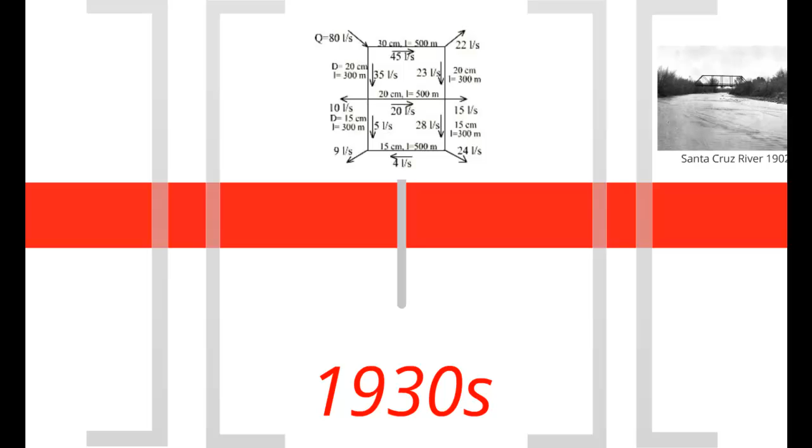In the mid to late 19th century and the first part of the 20th, many hydraulic engineers had been hard at work developing equations we still use today: Darcy, Weisbach, Chézy, Manning, Hazen, and Williams. In 1936, Hardy Cross developed a method of solving for hydraulic properties in a pipe network that was much more efficient and easily used than then current methods, and enabled many problems to be solved even before the advent of computers. These innovations enabled better design of pipe networks for water distribution.

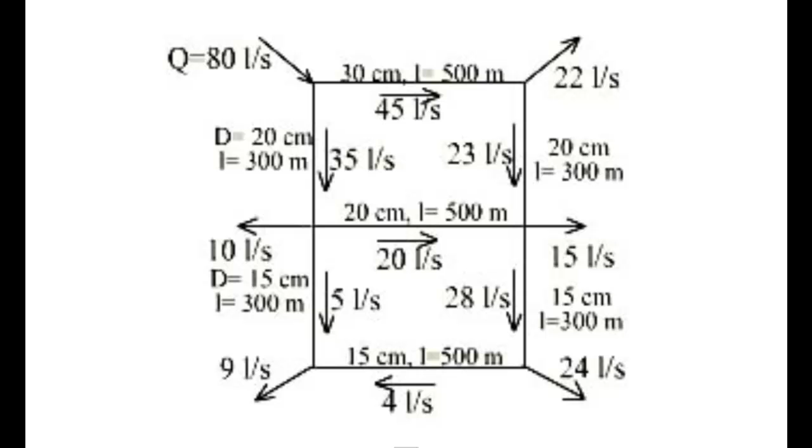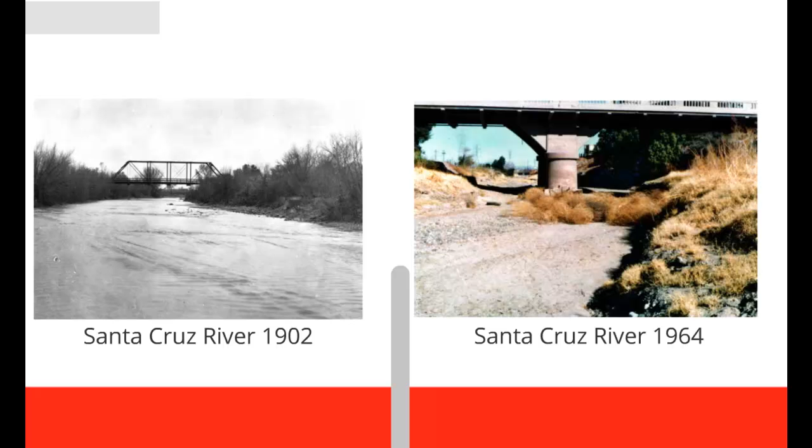By the 1950s and 1960s, it was becoming apparent that waters in the U.S. faced serious problems in terms of pollution and other issues of water management. When we do not take care of our water resources, many difficulties can arise. Here in Tucson, one of the biggest problems related to water was that people started to take more water out of the aquifers than was replaced naturally. The level of the water table dropped dramatically, and the Santa Cruz River, which had historically flowed year-round and provided water to Tucsonans, began to go dry for most of the year.

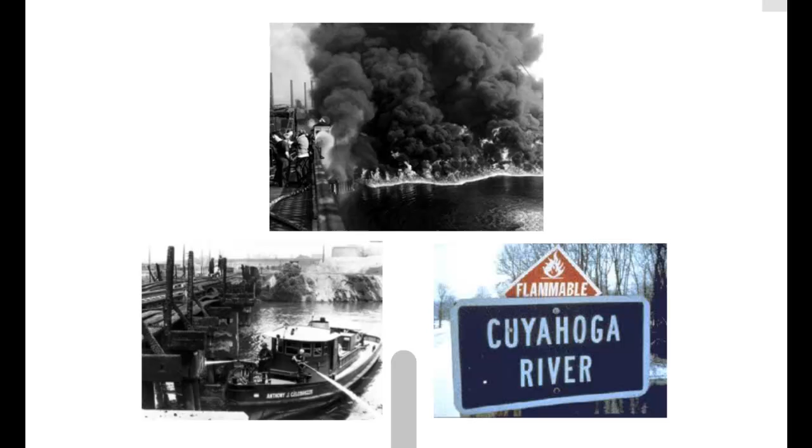On the national scale, the critical moment of realization about water problems came when Ohio's Cuyahoga River burned in 1969. The fire was one of several that had occurred there and elsewhere, but it served to draw attention to the terrible water quality problems caused by improper disposal of industrial chemicals. In the shadow of the Burning River incident, Earth Day was established in 1970, the same year that the Environmental Protection Agency, or EPA, came into existence. And the landmark Clean Water Act was passed in 1972 when Congress overrode President Nixon's veto. In 1974, the Safe Drinking Water Act established standards for concentrations of many substances in drinking water.

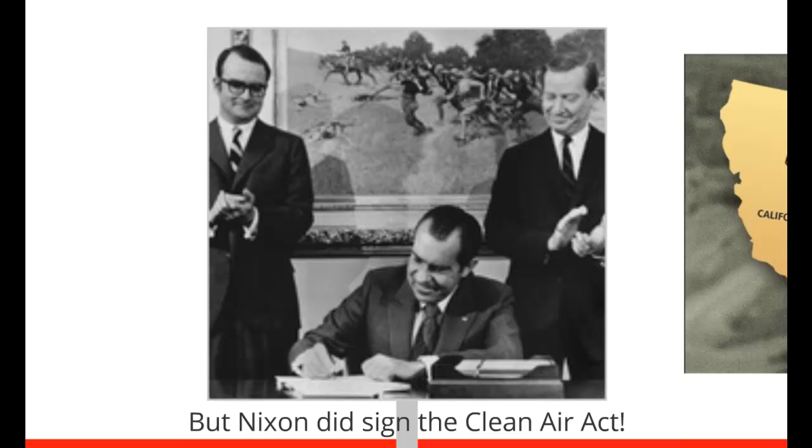Here in Arizona, the construction of the Central Arizona Project Canal began in 1973. The division of Colorado River water amongst 7 western states, with an allotment for Mexico, began in 1922, with final approval of the Colorado River Compact in 1944. After over 20 years of lobbying by Arizona residents and politicians, the construction of the CAP Canal was approved by President Lyndon B. Johnson in 1968. This system of canals and pumping stations brings water to Phoenix and Tucson all the way from the Arizona-California border. The project cost over $4 billion. Today, Arizona's share of the water from the Colorado is 2.8 million acre-feet per year, or enough to support about 2.8 million families of 4 annually.

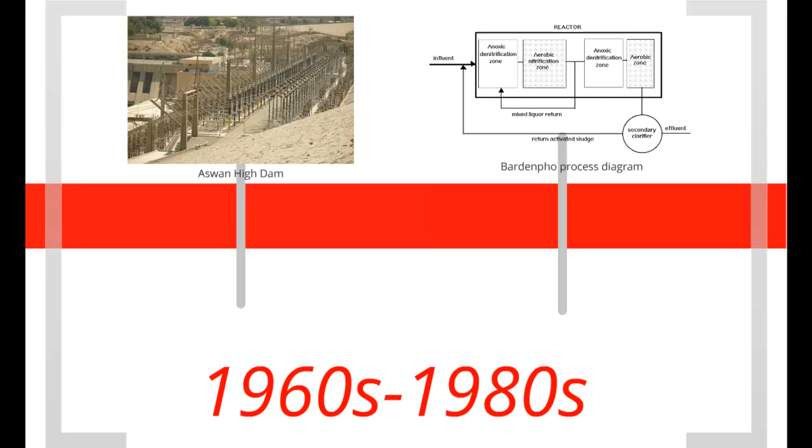Elsewhere in the world, water innovations continued as well, with Kuwait in the 1960s pioneering the use of seawater desalination technology using a method known as multi-stage flash evaporation. In the 1970s, the Aswan High Dam was constructed in Egypt, forming the world's 3rd largest reservoir along the Nile River, a project that produces electricity and reduces Nile flooding, but required thousands of people to relocate and some ancient monuments to be moved to keep from being flooded. And in the 1980s, a South African engineer named James Barnard developed the Bardenpho process of wastewater treatment, which can remove many more nutrients from wastewater with fewer chemicals.

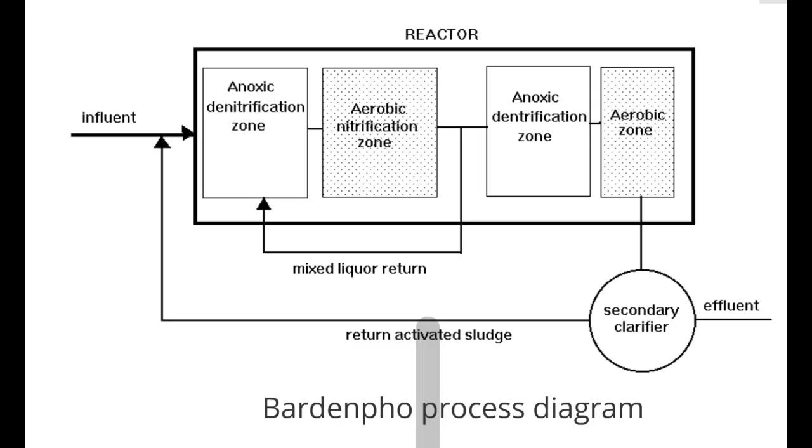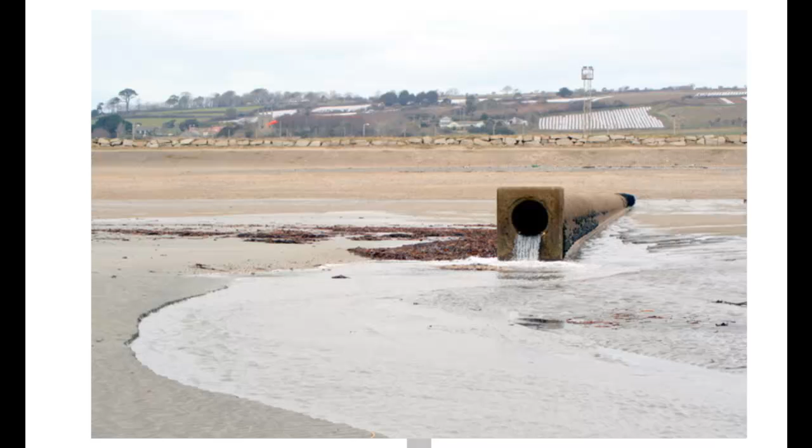The 1980s saw 2 major pieces of water legislation passed in the U.S.: the Safe Drinking Water Act amendments of 1986, which set maximum concentrations allowed in drinking water for 83 contaminants, and the Water Quality Act of 1987, which regulated stormwater runoff and non-point source pollution, like that which comes from agricultural areas.

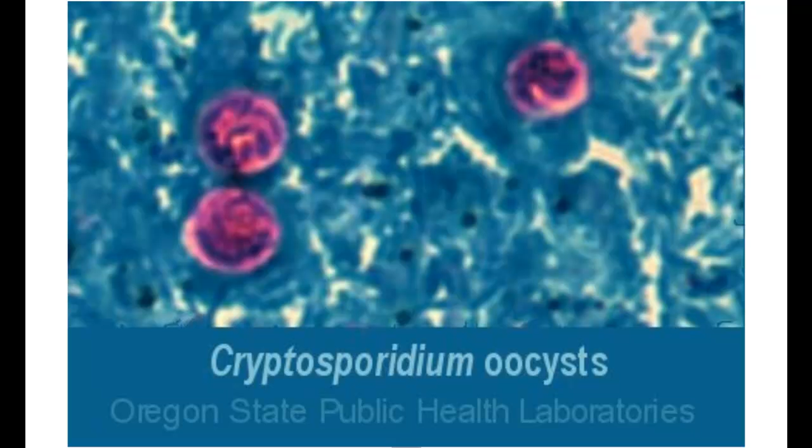In 1993, nearly 1/4 of the population of Milwaukee, Wisconsin, was sickened with the parasite Cryptosporidium, which was contaminating the public water supply. 100 people died, and direct medical costs were over $30 million. The Milwaukee outbreak was one of 10 Cryptosporidium outbreaks during the 1990s. In 1996, the UV Waterworks was invented by Ashok Gadgil. The portable unit can purify hand-pumped or hand-poured water at a cost of less than 1 cent for 60 gallons, making it a feasible solution for developing areas.

Around the year 2000, Geographic Information Systems, or GIS, started to be used in public water systems to detect leaks, which can be a major source of lost water for utilities.

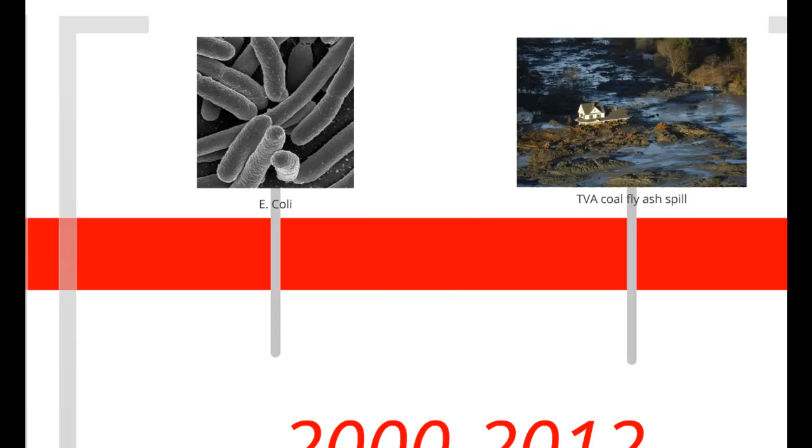The early 2000s also saw several environmental and public health disasters, including extensive mercury contamination in fish from the Great Lakes, the sickening of 2,500 people and deaths of 7 due to E. coli contamination in the public water supply of Walkerton, Ontario in 2000,

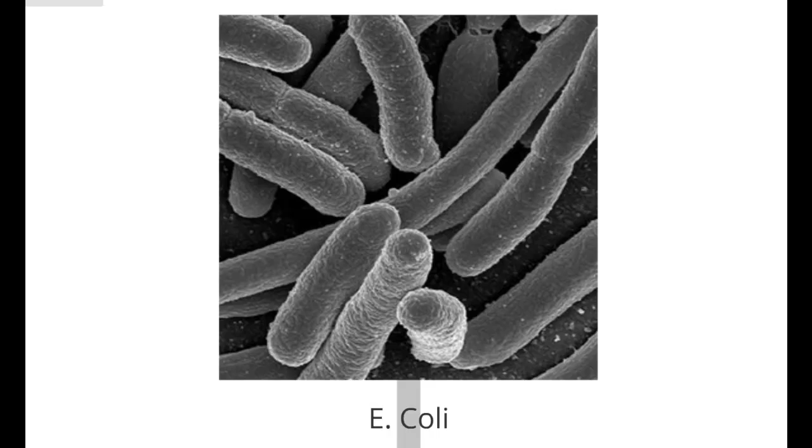the release of 100 tons of chemicals into China's Songhua River, an attempted cover-up by officials in 2005, and the 2008 release by the Tennessee Valley Authority of over 1 billion gallons of coal fly ash sludge, and subsequent federal investigation into whether TVA intentionally misled residents about the safety of the spill materials.

Also, the World Glacier Monitoring Service reported in 2008 that the accelerated melting of major glaciers will adversely affect power generation and drinking water supply in South Asia and South America.

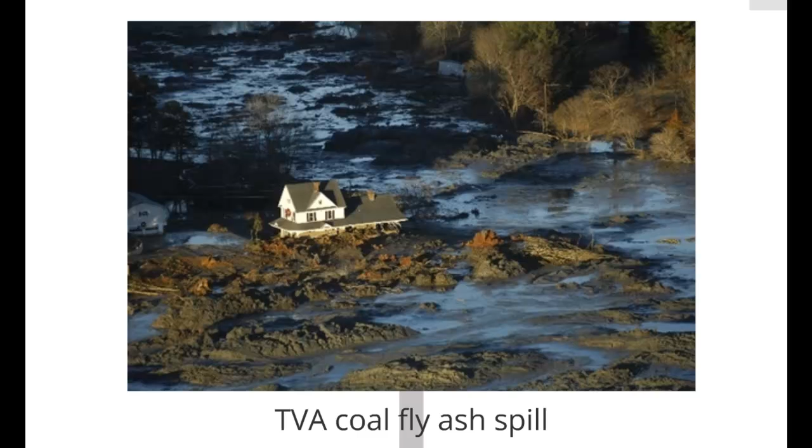So what happens next? Humans have developed ways to move water across mountain ranges, transport waste, and treat wastewater back to a quality that meets drinking water standards. We have developed better ways to design water distribution systems and model the hydraulic and chemical properties of water.

But there are still over 1 billion people without access to clean water and over 2.5 billion whose access to sanitation is inadequate, and contamination of water supplies by industrial chemicals and microorganisms can still threaten people's lives even in countries where safe drinking water is the norm.

The United Nations says that with regard to the Millennium Development Goal to cut in half by 2015 the proportion of the population without sustainable access to safe drinking water and basic sanitation, the world is on its way to meet the drinking water target, but that the sanitation goal appears to be out of reach.

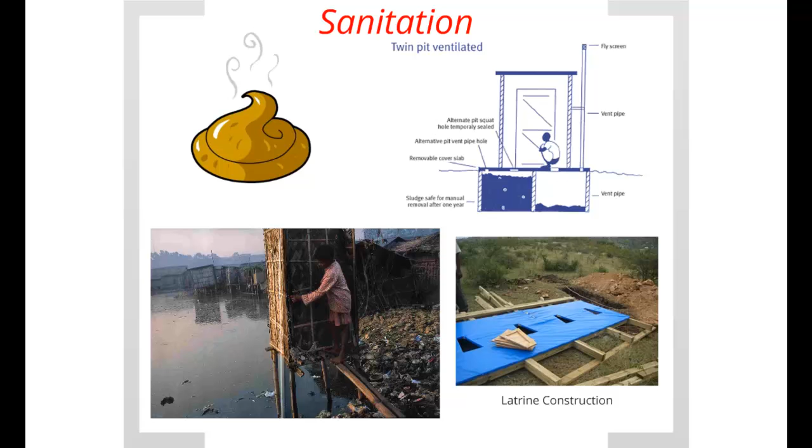One alternative supply of phosphate is to recover it from wastewater or even directly from urine in systems that can separate waste right at the toilet.

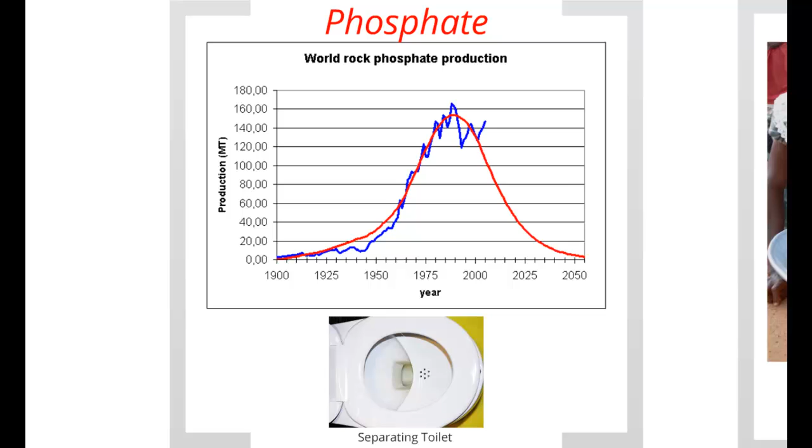Without a doubt, engineers will play a major role in continuing to ensure and expand access to clean water in the coming decades. From simple devices like the Tippy Tap that promote hand washing, which can reduce by almost 50% the risk of diarrheal disease, to basic water treatment methods like solar disinfection and slow sand or ceramic filtration. Engineered devices that can be made available to developing areas at low cost can greatly reduce the effects of waterborne illness.

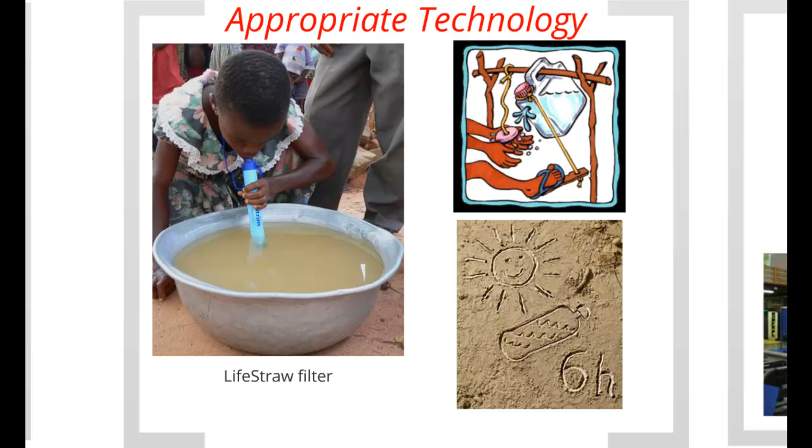And from improving desalination methods, which transform salt water to fresh, to developing real-time sensor methods to detect contamination in public water distribution systems, engineers are on the cutting edge of innovation for even the most advanced water systems.

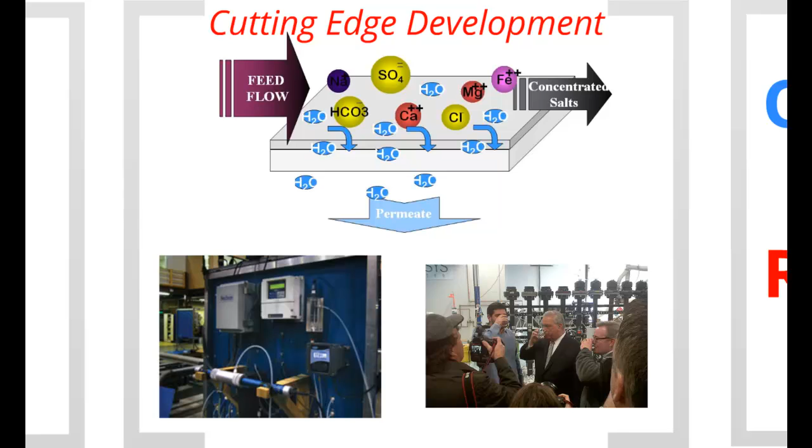In this unit, we'll start out by reviewing what we know about water and delve more into why it is challenging to provide access to clean water. Then, we'll look at the 4 elements of water access: quantity, quality, reliability, and cost.

We've already seen these elements at play throughout water's history, from Roman aqueducts bringing sufficient quantities of water into Rome, to John Snow breaking the Broad Street pump handle to protect Londoners from poor quality water, from building dams to ensure a reliable supply throughout the year, to the development of the low-cost UV Waterworks treatment. As we progress in the unit, we'll look at each of these aspects today and how engineers are improving lives with respect to water access.